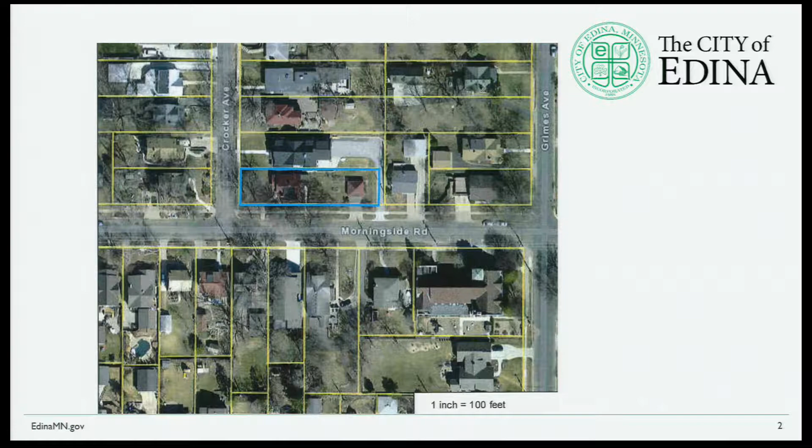Chair, members of the Planning Commission, this is a variance request for 4249 Crocker. The subject property is located in the northeast corner of Crocker Avenue and Morningside Road, as highlighted. It is a 1 1/2 story home that fronts Crocker with a 2-car detached garage side loading onto Morningside Road. This particular lot has two front yard setback requirements: one required along Crocker, and also along Morningside Road, given that the house directly adjacent to it is also facing Morningside Road.

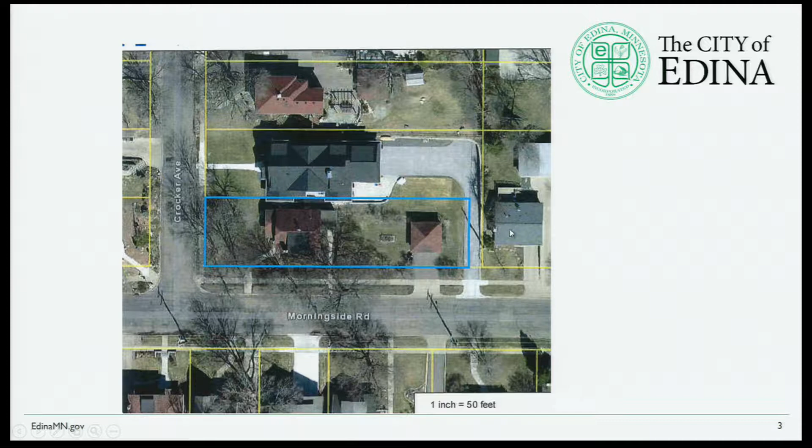And the setback along Morningside Road does not match the home that's directly adjacent. The south setback is a little bit over 16 feet.

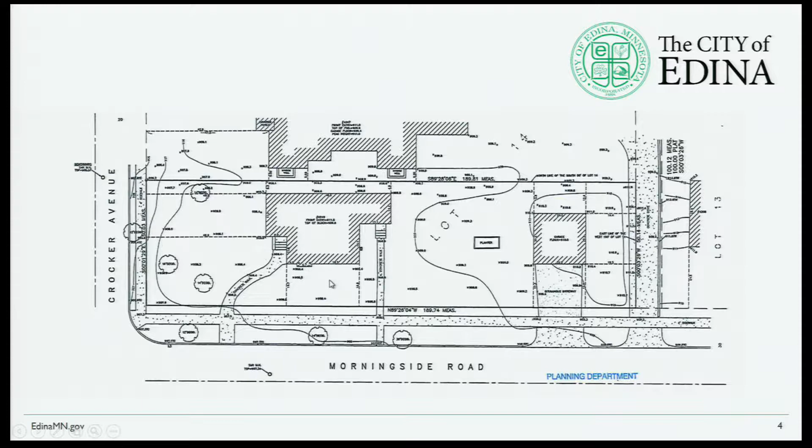The new home will be located further away from the north lot line. It will actually provide a 6-foot interior side yard setback instead of the minimum 5-foot side yard setback. They will also be increasing the setback along Morningside Road from the existing home — it will be a little over 17 feet, versus the existing home which is a little over 16 feet away. So in terms of the new conditions, it will be improving on an existing non-conforming condition on the south side, and it will be greater than the minimum setback on the north side.

All other aspects of the plan do conform to the ordinance requirements. It conforms to the front yard setback, has a much more generous than 25-foot minimum rear yard setback, and is within the lot coverage requirements — slightly under the 25% maximum allowable lot coverage. It is within the 30-foot height requirement as measured from average existing grade.

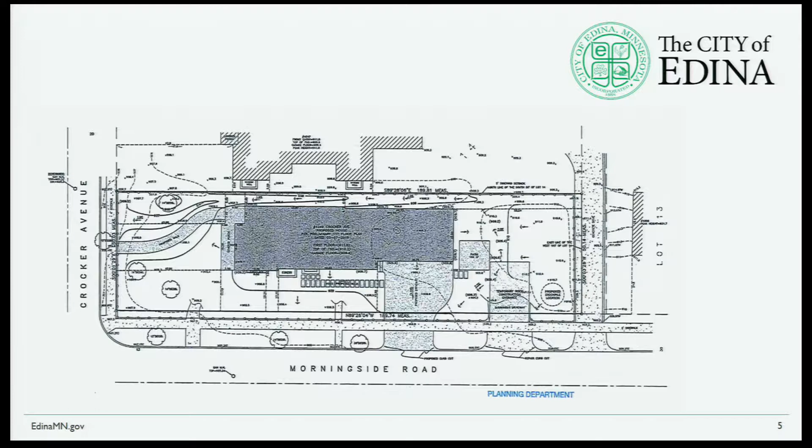The top elevation is the elevation that affects the setback along Morningside Road. They will be increasing the setback just slightly from the existing home. They will have a garage loading off of Morningside Road, similar to the existing conditions, however this will be an attached garage.

This lower elevation is the elevation that will be facing Crocker, which is considered their front, the front of their home. They'll have their front door there, and this home lines up with the home that's adjacent to it along Crocker.

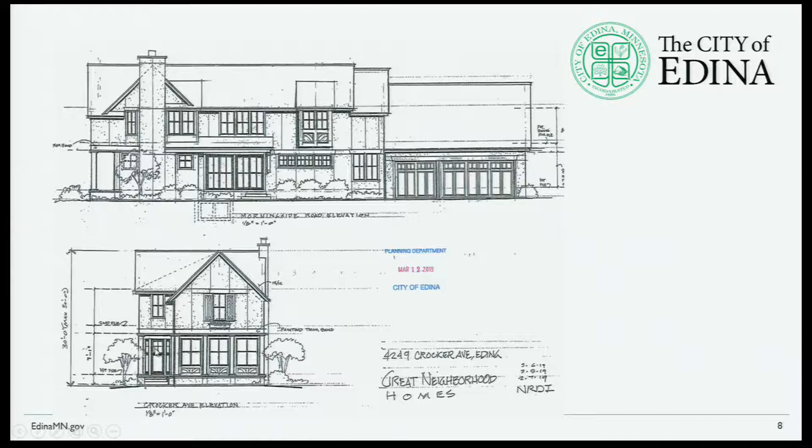And there's the north elevation, the interior side yard elevation that has a greater than 5-foot setback. Currently it's non-conforming; they'll be increasing that to 6 feet. And then the rear elevation, that would be the sidewall of the garage that would be adjacent to the house, facing Morningside.

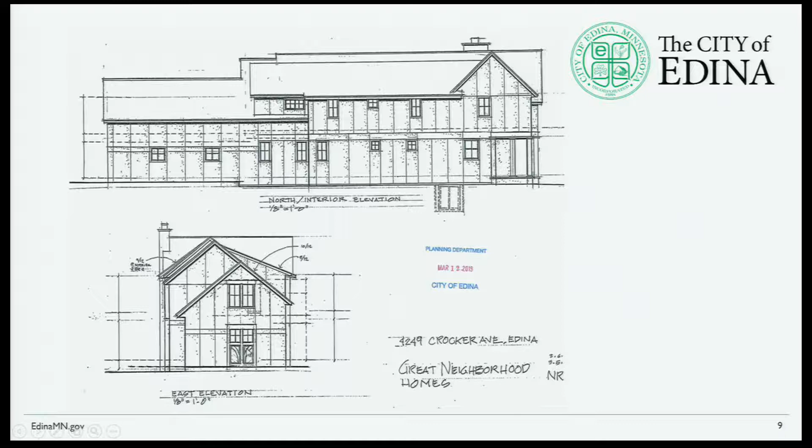And here's some renderings giving you an idea of what it will look like on the block to scale, given the house next door. The house next door is a tear-down rebuild. They are not increasing the first floor height of the new home, so it actually is just a little bit lower than the existing home. It will line up with the adjacent home.

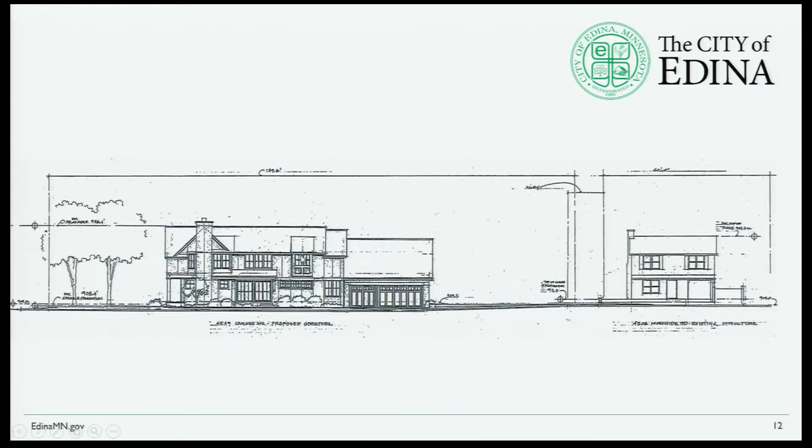And then here's the Morningside view with the home that's adjacent and fronting Morningside. There's quite a bit of distance between the two homes, and there's a driveway between the two that actually is the driveway for the home along Crocker. It kind of winds around this whole lot of the subject lot. So there is generous spacing between the two, and this is the elevation that is affecting the area of the variance.

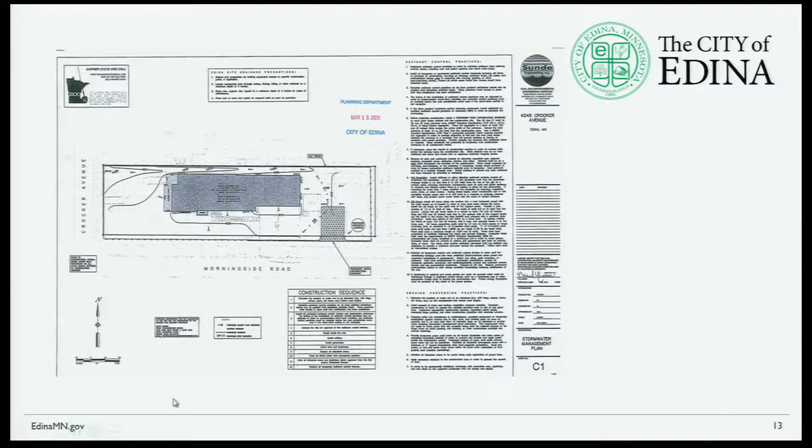This is a grading, drainage, erosion control plan signed by a licensed professional engineer. There was, or there is, a memo included in your packet from our engineering department indicating that it will not have a negative effect on adjacent properties.

Here's a photo of the existing home. As it fronts Crocker, you can see the home next door. Currently, the spacing between the two is much closer. It will increase with the new construction.

This just shows the homes that are lining up along Crocker with the existing home here. They will maintain that with the new home. Another view along Crocker, the house next door, and the spacing currently is much closer.

And then going along Morningside Road, the existing house, the detached garage, and the home that's adjacent to it, fronting Morningside, and this is really what's setting up the requirement for the front yard setback variance.

So the question is, does it relieve practical difficulties that prevent a reasonable use of complying with the ordinance requirements? The proposed use is a permitted use in the single dwelling unit district and complies with the zoning standards with the exception of the setback along Morningside Road.

The practical difficulty is caused by the existing location of the home to the east, and the required south setback must be matched to the subject property. The proposed new home is reasonable on the south side due to the lot having 2 required front yard setbacks.

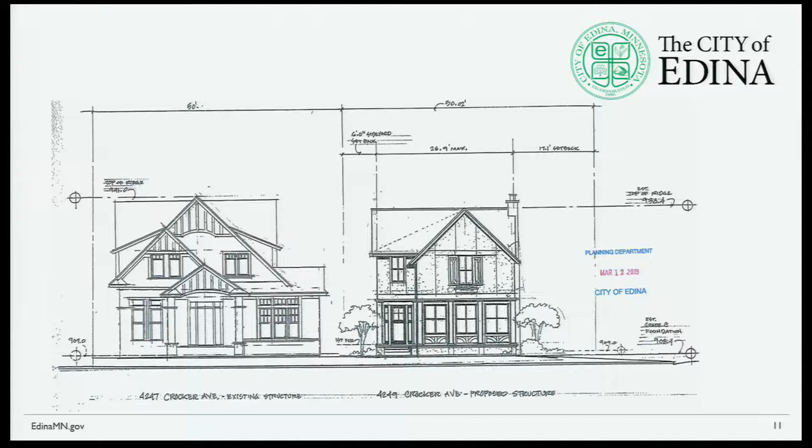Chris, when we figure lot coverage, does it include the garage? Yes. All right, so I am just looking at their sheet for the new plan. Right now, it's stating that the lot coverage would be around 25%, I think it's 24.8.

24.8. Do you know if that includes the garage? It does. It's on the survey as well. The surveyor calculated the coverage. It includes, it's an attached garage, it includes the entire house. So the entire footprint of the house plus the garage is 2,185 square feet.

I think that's low. I did a calculation. I think that's actually just the house. So I think that might be wrong, that the actual lot coverage is actually closer to 30%. It just struck me that if the original house was 18-some percent, and now it's a significantly larger house, it didn't seem as though it was only 25% lot coverage, but I could be wrong.

I just wanted to confirm that that house number of 2,185 square feet includes the garage. It's also indicated on the main floor plan, according to the designer. They've included the garage, the house, the screen porch, the entry porch, and then the patio. The patio actually doesn't get included because it's 150 square feet, and we don't include that.

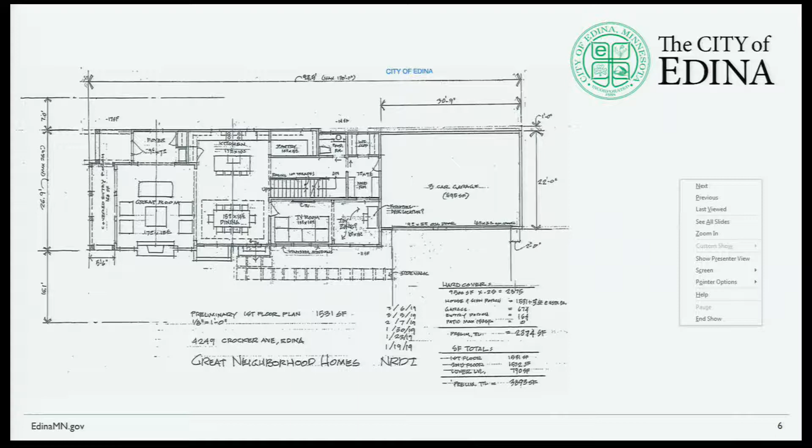Yeah, okay. Yeah, when you look at those figures, it does appear it's included. Although the numbers are slightly different.

And do you know what's meant by, on one of the drawings, it said preliminary, and then it said maximum? Let me see what page that is. Yeah, it would be right after that, the floor plans. Keep going. Next, right there. Okay, so on the overall, the very top dimension says 94.5, and then it says maximum 130?

I guess that would be an answer or a question for the designer. I was taking the hard coverage calculations off the survey, so I... Okay. All right, thanks.

Any other questions for staff? I have one question, Chris. When we calculate lot coverage and it's a detached garage, does that get included in the coverage? Yes, it does. Okay, thank you.

And I think the other issue here, there are folks here that might want to talk eventually about the water coming off the hard surface of this house and how it's handled and where it goes. The downspout locations could be critical about how that might be handled. And I think that's a little bit more detailed than these drawings want to reflect at this point in time. So when we get to those pieces, I'd like to have folks talk about those.

That's okay, thanks. Do you have a presentation? No. Great, that's fine then.

Hi, Scott Busyn with Great Neighborhood Homes, 4615 Wooddale Avenue. I'm the builder, and I'm here with my clients, Sarah Bakken and Kush Chittapanda. They're the new owners. They're excited about moving into the Morningside neighborhood with their two children. I think Chris did a great job with the presentation. I appreciate the chair and the commission looking at this variance. So if you have any questions, I'm here to answer them.

Mr. Hamilton? Well, the first one would be the landscape plan, and it does seem to run right through the sidewalk. Yeah, the landscape plan is a preliminary plan. Obviously, when we go in for permit, we would have to turn in our survey with that plan. The fence would have to be inside the sidewalk per city requirements. It cannot be over the lot line. It cannot be higher than 4 feet. Can't be higher than 4 feet on a street side. So we would follow the zoning rules of the fence.

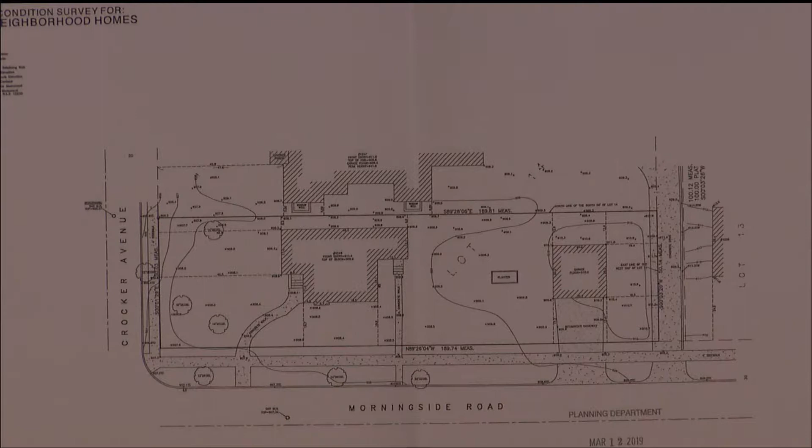Commission member, I brought a couple documents that are submitted from the applicant. I can kind of run you through a few of the things that I was seeing. The existing conditions site survey provides elevations along the property lines at the building corners, and then it provides some contour lines. And generally the lot drains both south and west.

But what I was seeing on the survey was the neighboring property to the north has a couple window wells right there near the property line. Window wells are a point of entry and a special concern when it comes to grading and swales. So the engineer for the applicant had given me a call as they were making their proposal, and I described to him my concerns that along that north property line, making sure that we don't cause damage to the neighboring property was my primary concern.

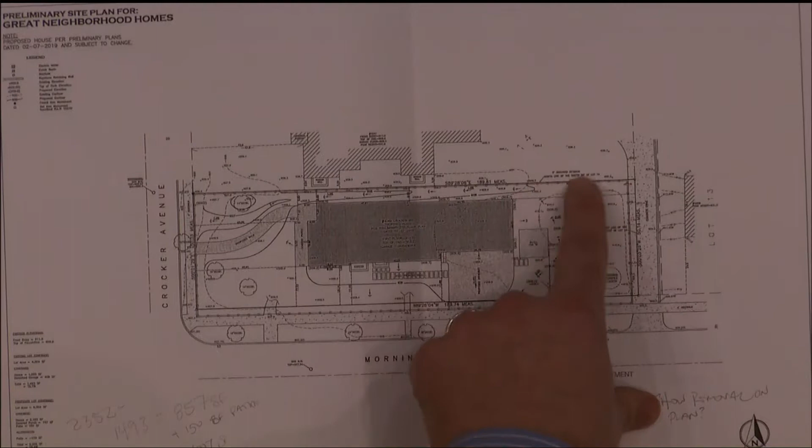The proposed plan, I think we're discussing something adjacent to this driveway. There is a high point there that might be the mound area the neighbor was referring to, but their driveway runs up the eastern property line.

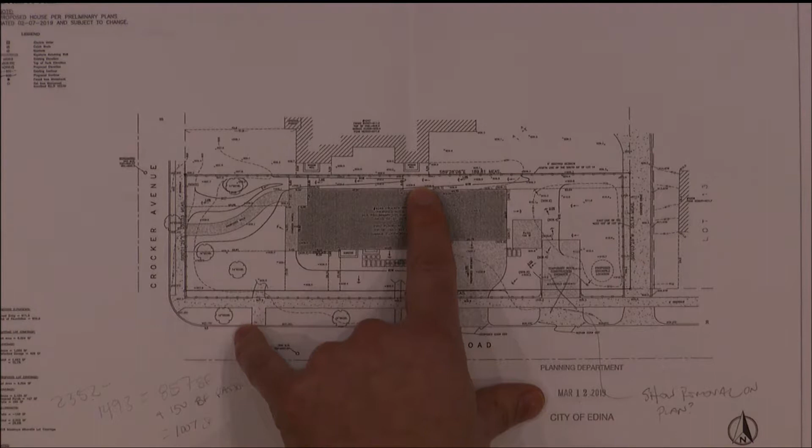So my understanding from these spot elevations is there might be a little bit of a flat area here. The applicant addressed the northern lot line concerns by creating a swale along that northern property line that flows off to the west.

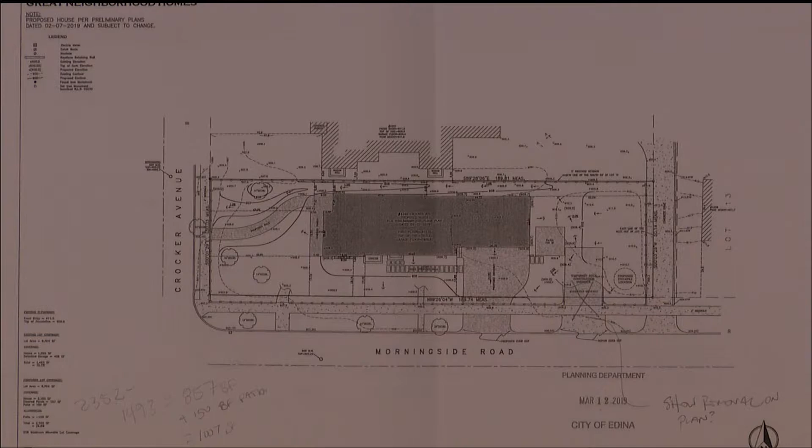It's pretty deep, around 8 inches to a foot at places. So that was, given the small drainage area, that addressed my concern for those window wells.

But how about the catch basin for the site, down on Morningside, right at the corner? Once the site drains off to the right-of-way, both Crocker and Morningside Road have curb lines that transmit the flow to local storm sewer systems. So once it's there, it makes it into our public system.

And you have no concerns there? I do have concerns there, as you mentioned, that there's flooding in the Morningside neighborhood. But we reviewed this for consistency with our policy that interprets both the code and the comprehensive water resource management plan.

I was kind of sweating it a little bit because when I added up the lot coverages, it was looking like from the existing to the proposed, what do we call this, lot coverage, that we're adding more than 1,000 square feet of lot coverage. But as you know, lot coverage isn't the same thing as impervious surface.

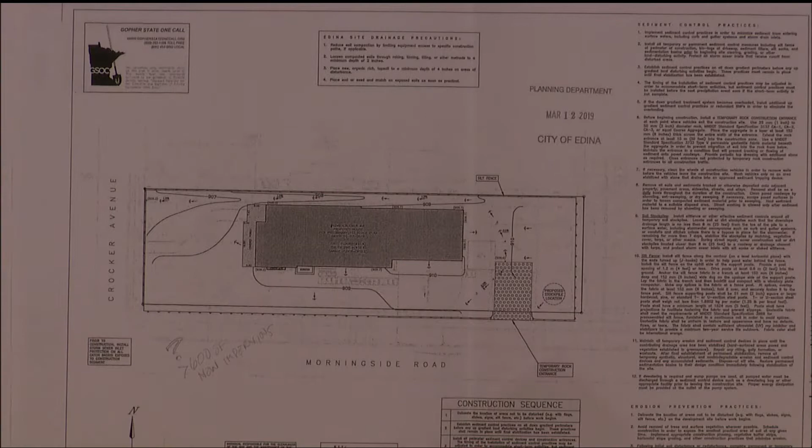So I looked to the stormwater management plan to see if they were under our 600 square foot new impervious threshold, and I couldn't find that directly offhand. As I mentioned in my memo, these are preliminary reviews, part of chapter 10 of the code. So at the point of building permit, I'll make sure the impervious surfaces new to the site don't exceed that 600 square foot threshold. If they do, some sort of mitigation measure will be required.

Ross, since we have you, especially with the plan up here now, if you look at how short the house used to be, those back downspouts had a fair amount of property to the east to perk before it ran off the site. And now it doesn't.

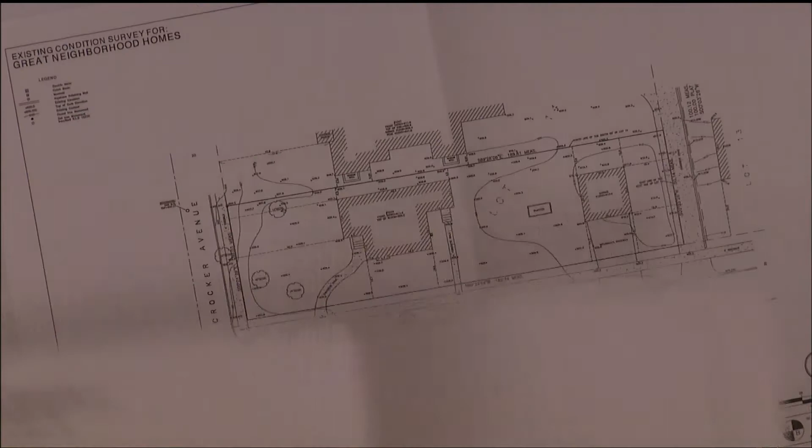So here's this existing conditions again. Maybe we can work together to point out the area you're concerned about. Well, the house runs all the way back to that planter noted on the site plan on the other side of the lot, which means instead of being able to run the stormwater back into the yard and let it perk back there, it has to run to the street. Yeah, because there's no yard left.

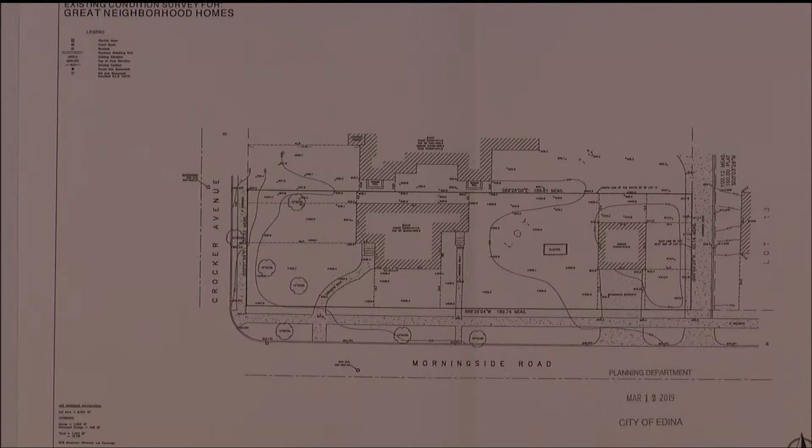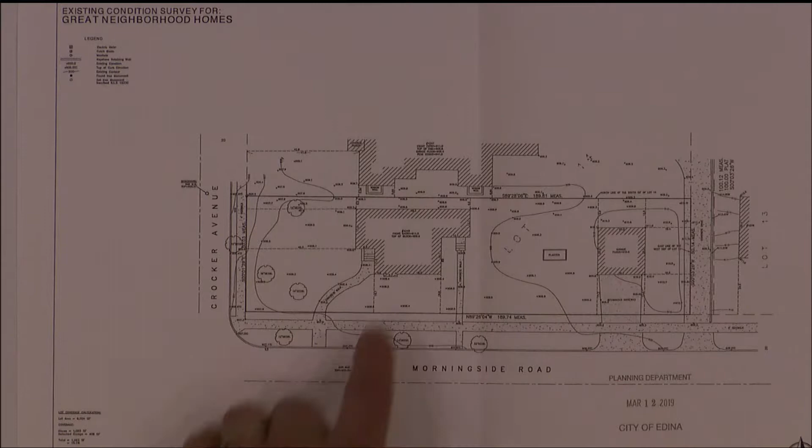So when I look at the existing conditions in our review, we don't generally focus on the land area between the hard surfaces, or gutters—we don't assume anything about gutters. That's kind of a future condition that's a bit more detailed than these plans get to. But I see a site with a house nearly completely surrounded by grass, flowing both along that north property line out to the west, or across their property to Morningside Road.

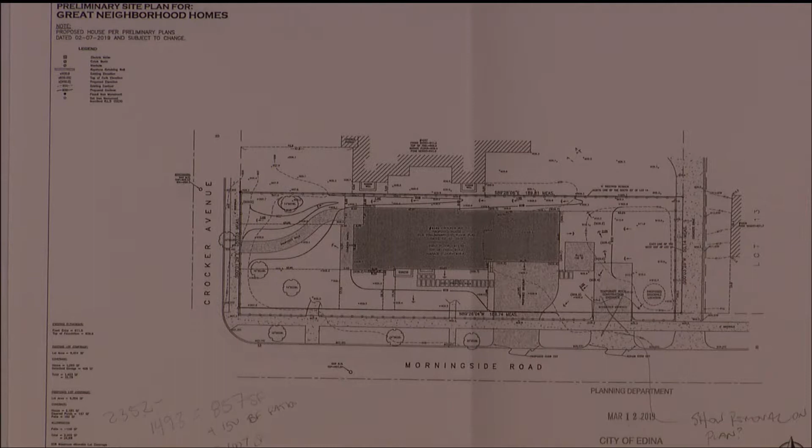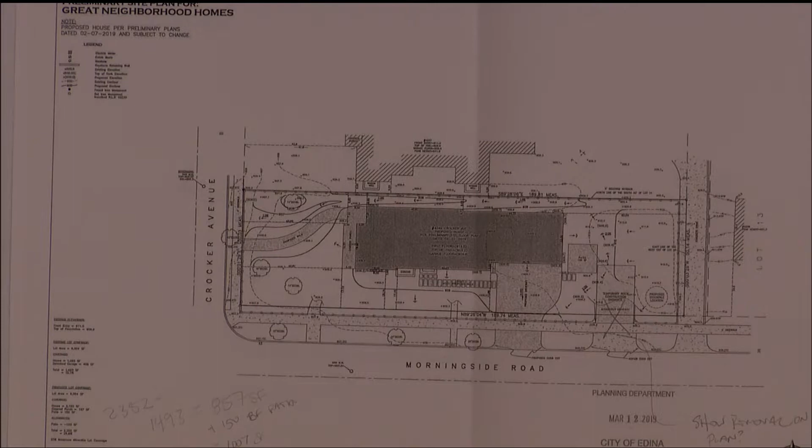When I look at the proposed application, those things remain. The real change that directs flow differently is that anything falling on this driveway is directed straight out. But I think Mr. Busen described it pretty well—their design approach looks like everything coming off the back is still making that long travel path, and anything coming off this part of the site is still perking over. But those things aren't really material to our stormwater review. They might be good site design, but that's not something we're looking at in the calculations.

And according to the calculations, the site can handle it and the stormwater can handle it. Yeah, it meets our policy.

Thank you. Any other questions for Mr. Bintner while we have him? Okay. Any other commission comments?

So this is kind of going back to the character of the neighborhood. I think I would agree with Commissioner Lee's comments that, based on the photographs provided, it is a bit bigger than what the neighborhood housing looks like, and I think that could look a bit clunky. Especially because I think of Morningside as a sort of quaint neighborhood with smaller homes, I think that's something to consider—you are building a larger home on a small lot with small lots and smaller homes surrounding you.

So one thing I also wanted to mention is that I noticed you had a 3-car garage, and as a way to reduce the amount of area you cover on your lot, a 2-car garage could be something to consider. I don't know if you guys are open to that, but that's something I would be willing to look at. So, yeah, that's my comment.